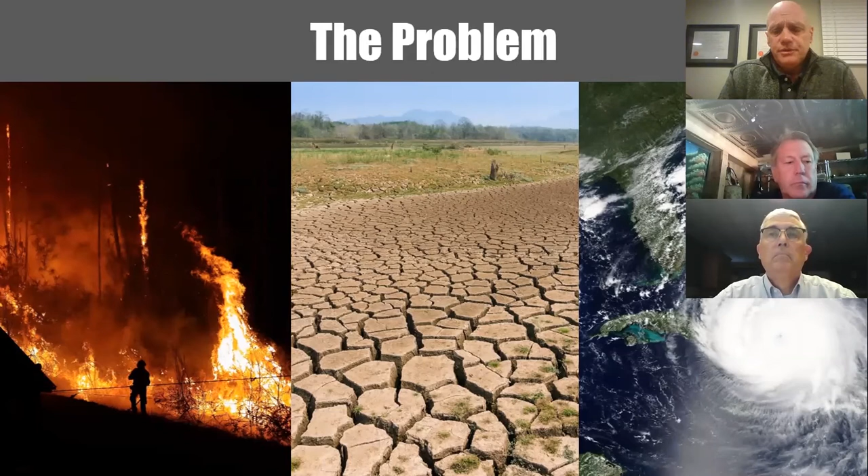Of course, the building industry is partly to blame for increasing climate change through CO2 emissions into the atmosphere.

We build a lot, and we're responsible as the design community for designing those buildings and hopefully reducing carbon footprint through two means: one, designing buildings that are low energy, that reduce carbon footprint during the use phase of building operations, which is pretty significant.

In fact, it's the most significant component of CO2 emissions. And then also, selecting and using materials in a way that reduces the embodied carbon emissions. That's the emissions from the manufacture and construction of buildings.

Every year, we build about over 6 billion square meters of buildings throughout the world. That's nearly 4,000 million metric tons of CO2 per year.

And by 2050, it's predicted by Architecture 2030 and other sources that the operational carbon emissions from buildings and embodied carbon emissions from buildings will be about equal, which means each of those needs to be addressed in a significant way.

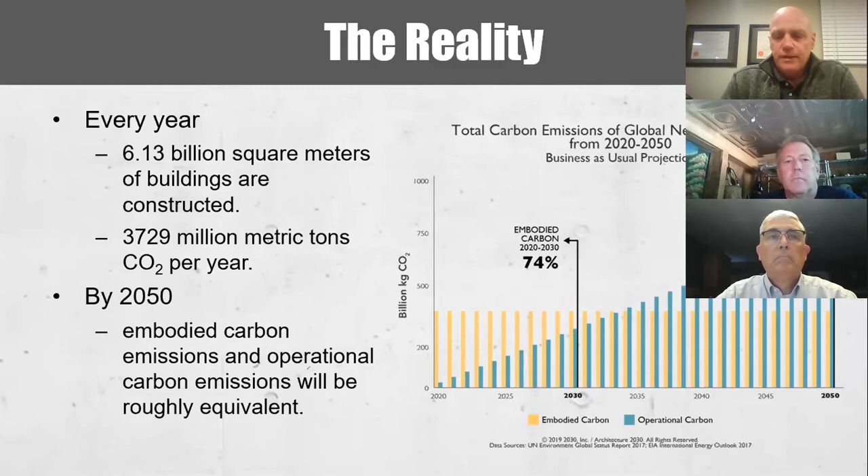The challenge is that building materials do emit significant carbon emissions. So embodied carbon from building materials produce about 11% of the annual global greenhouse gases. And concrete, iron, and steel produce about 9% of those annual emissions.

Now, likely the need for these robust materials will be in demand for the foreseeable future. And the trick here is to understand how we can minimize environmental impacts of these building materials. Specifically today, we're going to talk about concrete.

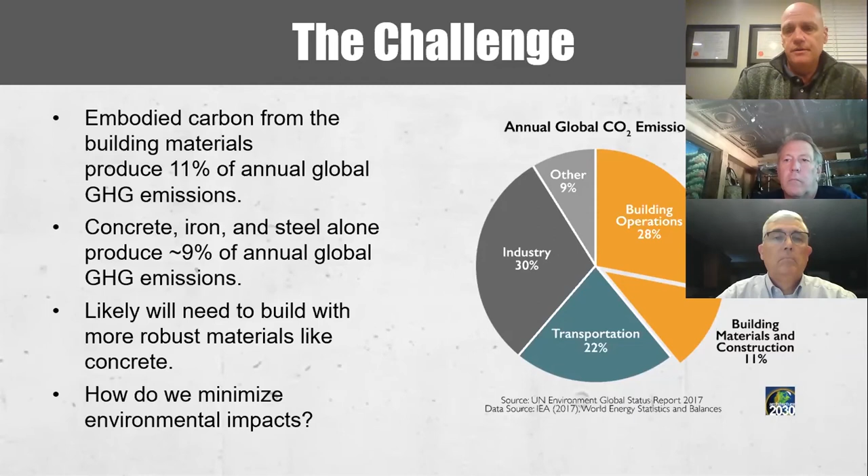What are the solutions? Well, it really is concrete innovations. Basically, we're talking about 6 basic steps: more efficient concrete mixtures, admixtures, blended cements, supplementary cementitious materials, carbon capture technologies, and high performance concretes.

So what do these two buildings have in common? Well, they're both places of worship. Both are built in Rome, Italy. But most importantly, both are built with concrete. And at the time, they were both innovative in the use of concrete.

The Pantheon, built in Rome in 27 BC, used Roman concrete, unique at the time, using volcanic ash and aggregate that was mainly recycled, some rock, but crushed tile and brick. The Pantheon is still standing today, 2,000 years later.

The Jubilee Church was built in Rome in 2003. And the innovation there is that they used photocatalytic concrete, which is self-cleaning. We'll get into more of that innovation later on in the presentation.

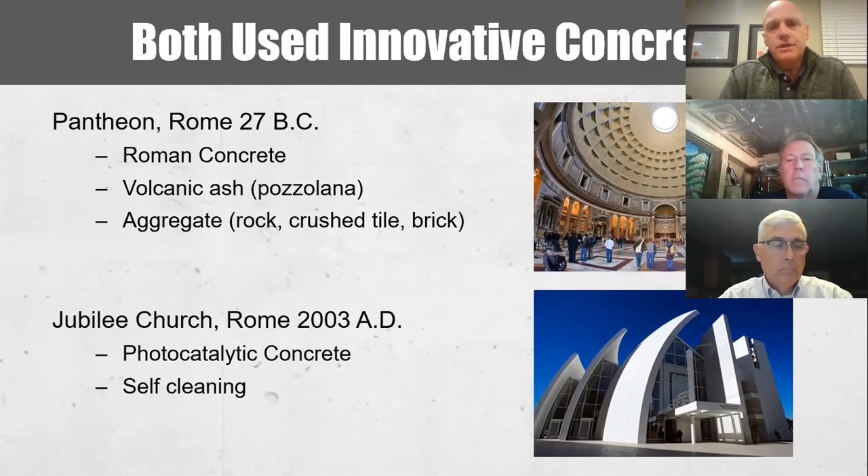Now, modern concrete is not that old. Really, ready-mix concrete is just over 100 years old. And delivering it in trucks is even less, started only about 80 years ago.

But Portland cement was invented in 1824, and it's combined with quarried aggregate and water really to make concrete. Those are the three main ingredients. Without that, you can't really make concrete.

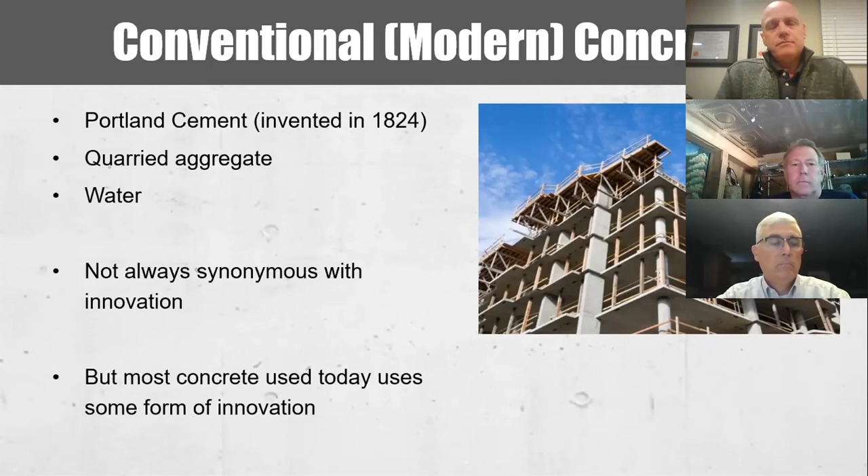And let's face it, concrete is not always synonymous with innovation. It's been around for a long time. But in fact, most concrete today uses some form of innovation, which we'll be talking about today.

The first innovation, and really the most important, is that we need to use the most efficient concrete mixtures. And Portland cement, which is the most important ingredient in concrete, is the glue that holds it together. It's one of the most valuable materials on the planet.

It's cost effective, it's available everywhere, it's durable, strong. Tallest buildings, largest buildings, longest runways, highways, everything is built with concrete. It's hard to imagine a building today that's not built with some component that is concrete.

And so that Portland cement needs to be thought of as this valuable material that can't be wasted. Even if you don't consider the environmental impacts associated with Portland cement, there are the economic impacts to consider. So both are important. If you can optimize the use of Portland cement, basically you're reducing the embodied impacts of concrete.

We really promote the idea of using performance-based specifications. There's not a lot of time to go through that today, what that really means, but basically it means no limitations on materials and quantities.

The standards today for concrete and the building codes really don't provide limits on the use of cement, admixtures, or supplementary cementing materials. They are really set by the performance criteria that you set as designers, whether it's strength, durability, stiffness, and so forth.

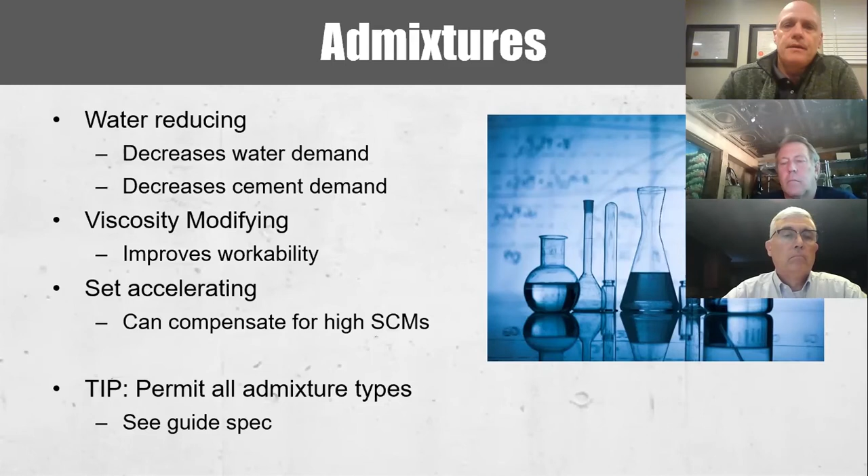Now this one is really important. Blended cements are a combination of Portland cement in addition to some other materials. The most common one is called Portland limestone cement, or type 1L, and it permits, in the standard ASTM C595, up to 15% interground limestone.

Interground limestone has nearly zero carbon footprint. It's usually a byproduct of the cement manufacturing process because there's a lot of powder generated when crushing limestone as the raw feed for making Portland cement. So if you can take some of that powder and intergrind it with clinker at the end of the processing of making Portland cement, you can lower the carbon footprint by as much as 10%.

Surprisingly, the performance of Portland limestone cement is almost identical to pure Portland cement. So it's really something that you need to specify and create demand for. It's still slow to catch on in this country, but to me it's a 10% reduction in carbon footprint just by using Portland limestone cement, with equal or better performance.

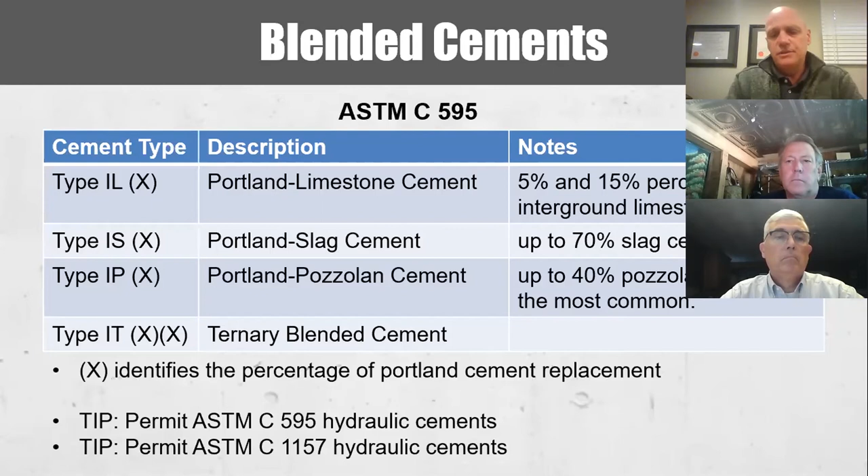What's great about it is that research shows you might be able to even use more fly ash and slag in combination with PLC to reduce carbon footprint even further. Now, there are other types of blended cements where you combine Portland cement and slag, or Portland cement and fly ash, and for the most part they work perfectly fine. But I would say they probably have even further barriers to acceptance, whereas Portland limestone cement really has no effect on performance and still provides that reduction in carbon footprint.

So let's talk about SCMs, or supplementary cementing materials. The two main ones that are used, and many of the projects you guys work on have concretes made with SCMs. Slag cement and pozzolans, like fly ash being the most common, are used in concrete all the time. And honestly, they provide the most reduction in carbon footprint.

I'll tell you why in a second. They're byproducts of other industries and therefore have very little footprint because they don't require a lot of processing. Slag requires a little more processing, mostly in grinding, but grinding doesn't take a lot of energy. And fly ash really is a byproduct of electric power generation. Yes, less of it is being made, but I'll tell you here in a second why there's still a great opportunity for fly ash in this country.

There's some other natural pozzolans even today, things like metakaolin or even volcanic ash that can be used. But in terms of the volumes required for concrete manufacturing, really fly ash and slag are the best options here.

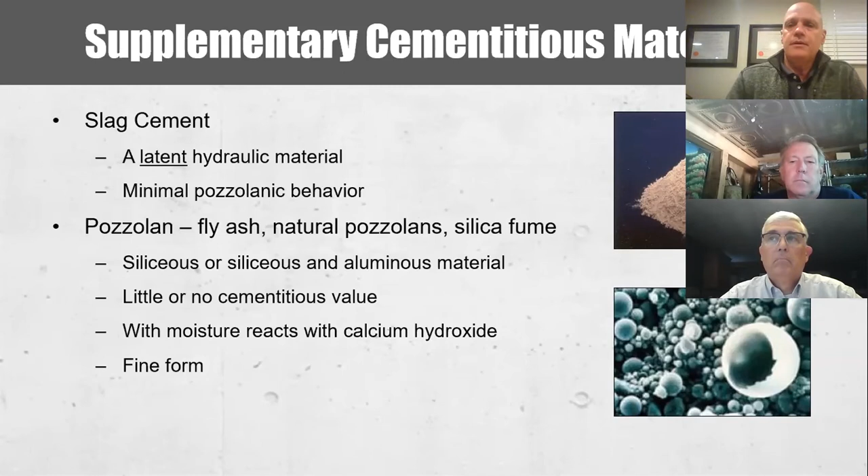Just a really quick chemistry lesson. You don't have to memorize this, but it demonstrates why these SCMs work so well. Cement reacts with water to form cementitious compounds. There are many compounds, but for the most part, the two main ones are CSH, calcium silicate hydrate, and calcium hydroxide. The CSH portion is the portion with crystals that really hold the entire matrix together.

Whereas the CH really is not very strong. It almost remains in a gel form. We don't see it that way, but it really is not that valuable. You'd rather not have that material.

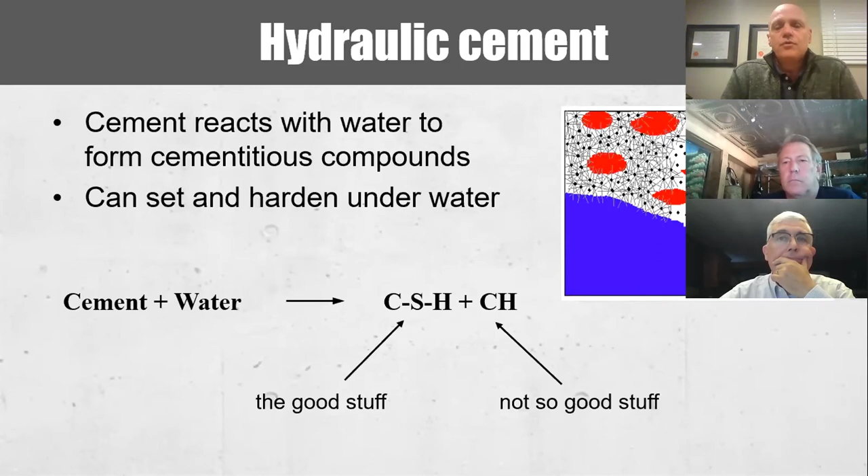And so if you look at the first line that represents just pure Portland cement with water, you get the CSH and the CH. But if you combine it with a pozzolan like fly ash, it reacts with the CH to form more CSH. That's why pozzolans like fly ash are so valuable. It eliminates the material you don't want in concrete and turns it into the material you do want.

Now, slag is a little different. It's not really a pozzolan, or has very little pozzolanic action. It is actually cementitious, but it needs this alkali lime activator, which is produced by the cement hydration process. So it does produce CSH, no CH - that's a good thing. And then there's a little bit of pozzolanic reaction that creates more CSH. That's why these materials work.

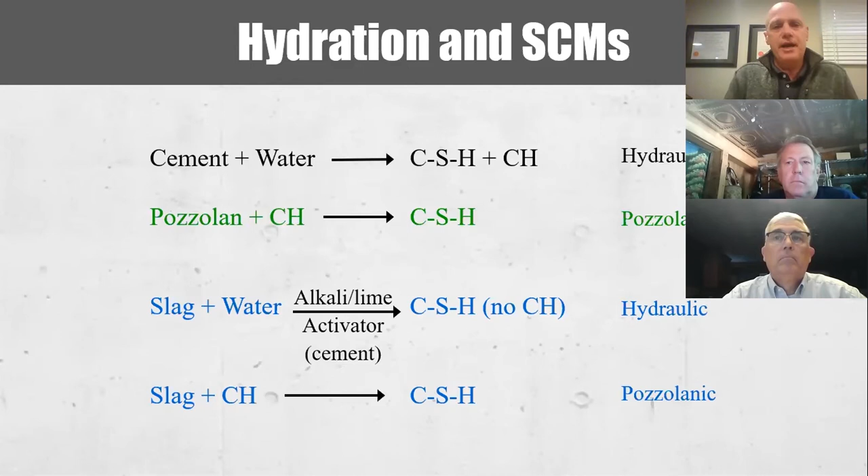It's not just that we're replacing cement. It's actually reacting with the byproducts of cement hydration that make them so valuable.

Just a case study - there are many, of course. Most high-rise buildings use high volumes of supplementary cementing materials. One of the biggest benefits of these materials is that they increase strength of concrete. And when you're building a high-rise building, using high volumes of SCMs is just a natural thing to do.

Trump Tower, 92 stories in Chicago, huge amounts of concrete - almost 200,000 cubic yards, which is massive. All the columns and walls required 12,000 PSI at 90 days. And remember that, because 90 days is important.

For elements of a building that don't require full strength at 28 days, requiring the strength at a later date permits higher use of supplementary cementing materials - again, a way to help reduce carbon footprint. The lateral resisting elements, the shear walls and so forth, went up to 16,000 PSI.

Now, self-consolidating concrete was specified for most of the project because of high reinforcement congestion, and then high volumes of SCMs were used to reduce heat of hydration. It basically used a lot of ternary blends and in some cases quaternary blends - in other words, Portland cement, slag cement, fly ash, and silica fume - to meet the requirements.

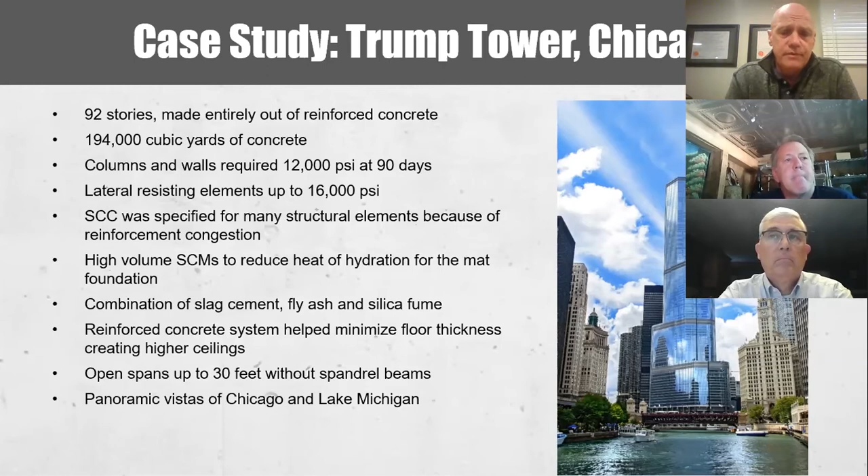And the whole idea here is, obviously a high-end residential building, 30-foot spans without spandrel beams. And if you've ever seen the location for Trump Tower in Chicago, beautiful vistas of the lake along the Chicago River.

Now, this is really, I think, the future of fly ash. Because of less reliance on electric power generation through burning coal, we're not going to have as much high-quality fly ash in the future. But we've been burning coal for a long time to make electricity, and most of that fly ash has been buried in landfills.

So there's a valuable material that some companies are now actually mining, beneficiating it in some way, which means it does need some processing, usually to dewater the ash. But also in some cases it may be out of spec to be used in concrete, so things like reducing the amount of unburned carbon, reducing ammonia, and adjusting particle size through different processes.

So I think this is a huge opportunity for our industry - 1.5 billion tons of coal ash in landfills or more that could be a source for literally decades.

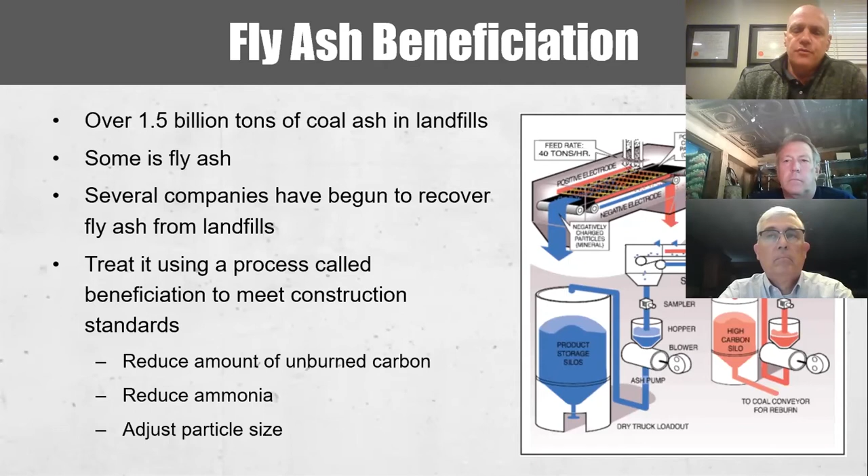And there are some companies already doing it. Another case study here: a project in South Africa, really designed with sustainability in mind. I'm sure many of you are designing projects with similar goals. In this case, the building came in at 50% more sustainable than the average office building. It reached the 4-star Green Star South Africa rating, used a lot of fly ash in the concrete, and reduced the overall concrete footprint by 30%.

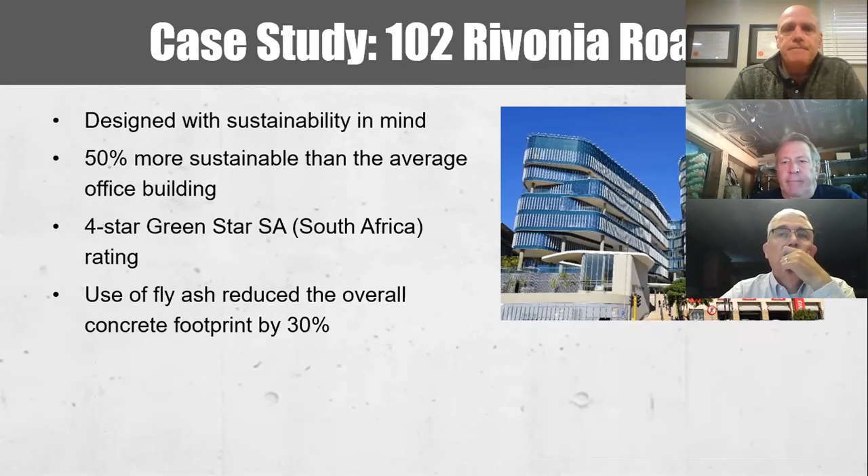The last item I'd like to talk about before handing it off to Dawn to finish the presentation is something that is probably not an opportunity today for most concrete, especially ready-mix concrete, called Geopolymer Concrete. But there's really a lot of promise with this concrete. It uses fly ash and/or slag and a chemical activator to form a hardened binder.

It's been done—there are companies that have actually created this concrete. It's obviously more expensive than conventional concrete, so it's usually used in very specialized applications, maybe high heat or high resistance to acids and so forth. But creating demand for it will result in more use and bring the cost down somewhat. The activators include sodium hydroxide or potassium hydroxide. They're highly alkaline, meaning they're caustic and hard to handle, expensive to make. That's what makes this concrete more expensive.

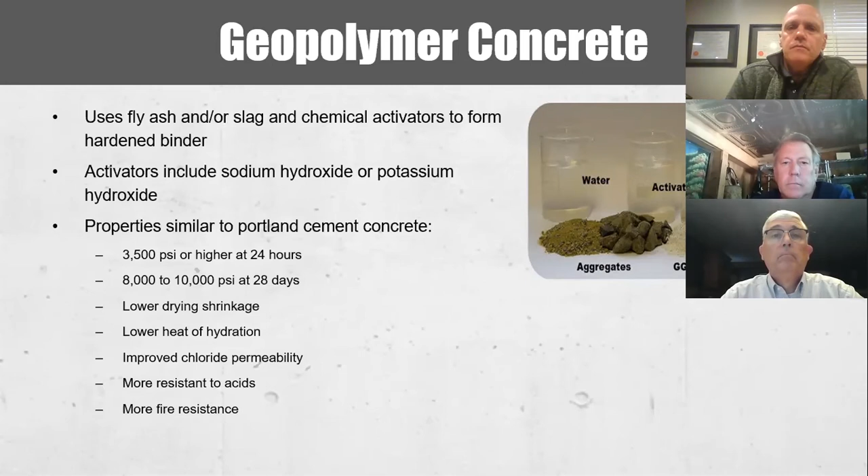But the properties are really favorable—similar strengths, a little bit higher generally than conventional concrete, but lower drying shrinkage, lower heat of hydration, and improved resistance to chemicals. Like I said, the drawback is the high cost to produce the chemical activator, and handling a high alkaline solution is just as difficult as handling a high acidic one. You oftentimes need temperature control during curing. So ideally, at least at first, there's an application for precast concrete.

What's really promising is the latest research out of Rice University. They studied all sorts of different fly ashes and slags to optimize the use of calcium-rich fly ash, nanosilica, and calcium oxides to use less than 5% of the traditional sodium-based activators. This means you can make concrete with a lot less activator, bringing the cost way down, plus making it easier to handle that caustic material, to a point where it may be commercially viable. So this is something to be looked at for the future.

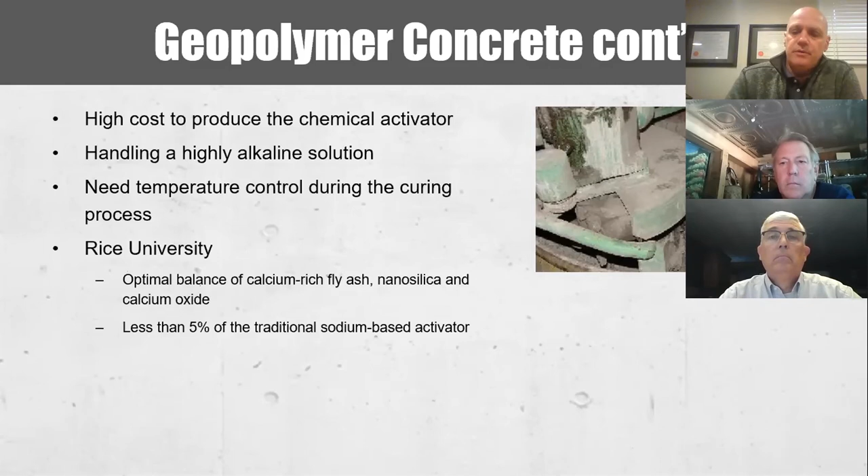It actually has been used—there's an example, and I'm sure there are more. The one we found was the Global Change Institute in Brisbane, Australia, Australia's first carbon neutral building and one of the first living building challenge projects. It's the first building to include structural geopolymer precast concrete, resulting in a significant reduction in the carbon footprint of the concrete for the building. So there's some promise with this material, but it's probably not something you can achieve today in the volumes you normally need on a building. Maybe something to think about for a case opportunity for a small project, or a portion of a project.

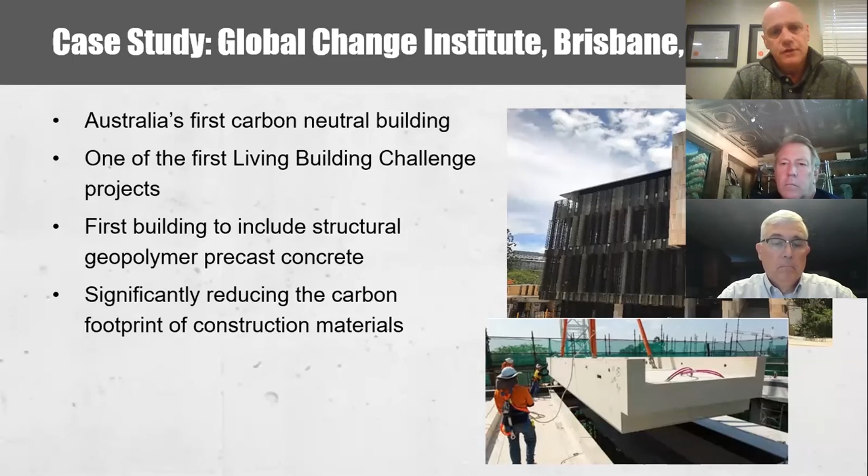With that, I'd like to transfer the presentation over to Don Thompson to complete the session today.

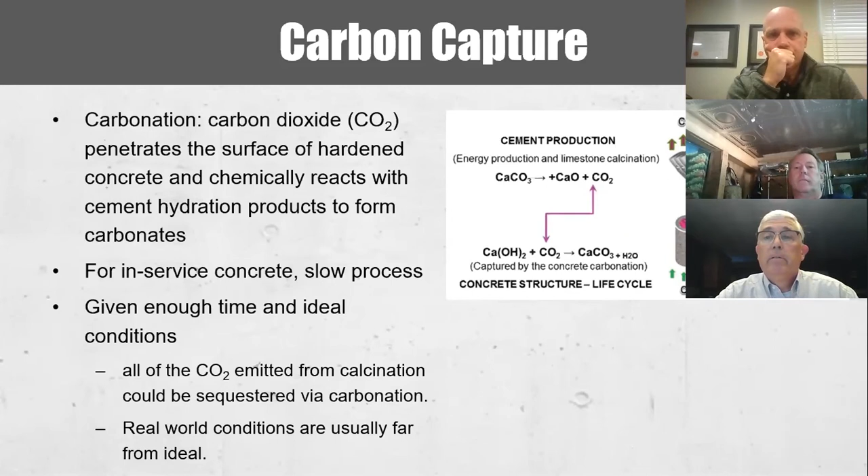The CO2 uptake is greatest when the surface to volume ratio is high. So when concrete has been crushed and exposed to air, that's a way to optimize this process.

Even with hardened concrete that's been in place, a study published in 2015 attempted to estimate how much CO2 was sequestered in concrete placed between 1930 and 2013. The study found that 4.5 gigatons of CO2 was permanently absorbed by hardened concrete throughout the world, representing 43% of the CO2 emissions from the production of cement.

So basically, we're looking at carbonation of cement products representing a substantial carbon sink and a game-changing development. Our industry continues to investigate ways to accurately quantify this process, which will impact the understanding of concrete's role in permanently helping to reduce greenhouse gas impacts.

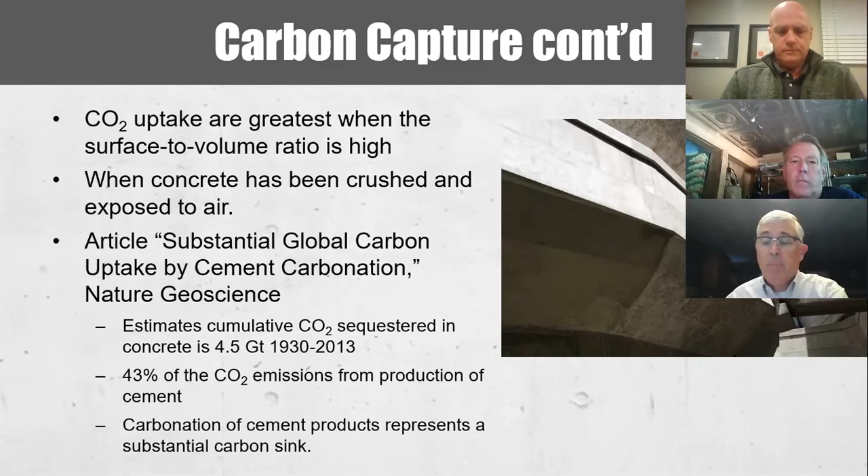As I mentioned, the best type of concrete for this natural carbonation process is crushed concrete, which can absorb more CO2 over a shorter period because you're maximizing the surface area of the material, so it can be more effective in that absorption.

Typically, concrete is not thrown away. Its weight and volume really move it more towards continual recycling. So you see it crushed and often used as roadbed or as backfill. It can even be used as aggregate for new concrete.

Ideally, studies have shown if you can leave the crushed concrete exposed to air for a period of 1 to 2 years before reuse, you're really enhancing and maximizing this process.

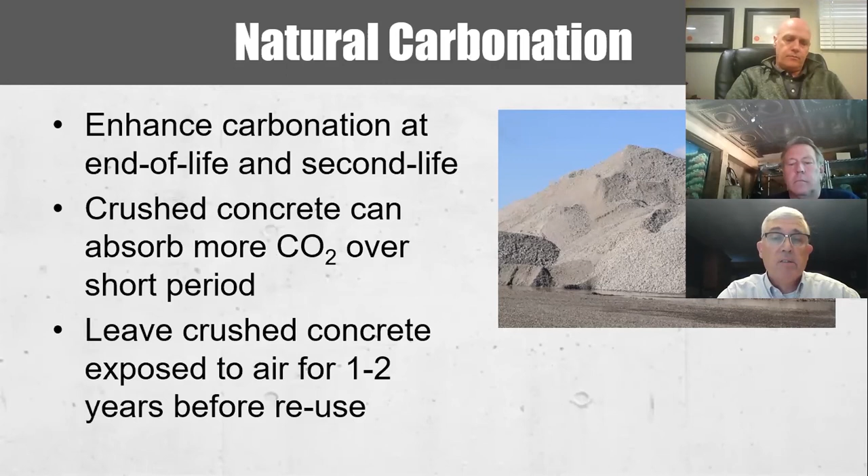So there are a number of entrepreneurs that have looked at this natural carbonation process and have been successful in developing ways of enhancing the production of concrete products by taking advantage of this ability of concrete to absorb CO2.

One such process, developed by a Canadian firm, takes purified and liquefied waste carbon dioxide captured from various industrial processes and injects this CO2 into the concrete during the mixing operation. This creates artificial limestone, or mineralization, within the ready mix.

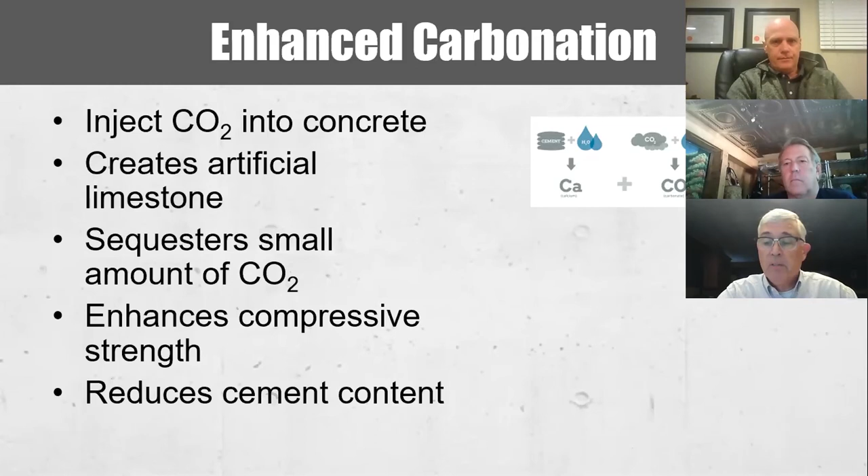The developers indicate there's a small amount of CO2 sequestered in this process, but probably more importantly, the compressive strength of the ready mix produced with this process is improved, which allows you to reduce the overall cement content in the mix. This is a viable process already in the marketplace, with over 100 ready mix plants nationwide taking advantage of it.

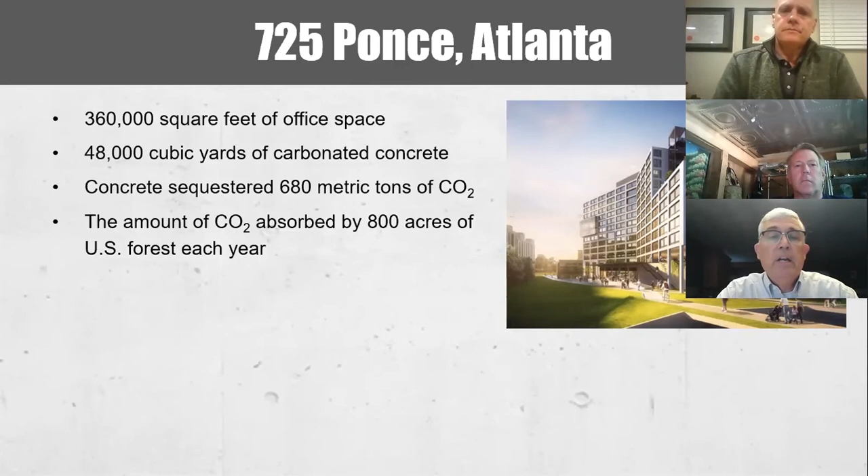Here's an example of a project done using this injection process: a 360,000 square foot office building that used 48,000 cubic yards of carbonated concrete, which sequestered 680 metric tons of CO2 — equivalent to the amount of CO2 that would be absorbed by 800 acres of US forestry in one year.

Another example of enhanced carbonation is the use of specially formulated cement. This cement is manufactured using less limestone, and in the calcining process, the kilns are fired at lower temperatures. The developers indicate this results in 30% less greenhouse gas emitted during manufacturing of this specially formulated cement.

That cement is then used to manufacture concrete products, primarily right now in the precast industry. You manufacture your precast components and then move them into curing chambers that have a CO2-rich environment, and with this specially formulated cement, the concrete is able to absorb CO2.

Based on the developers' indications, the concrete absorbs CO2 equal to about 5% of its weight, and overall they claim the carbon footprint of concrete produced with this process is reduced by 70%. This has seen some application in the precast industry, and the developers are looking for ways to introduce it into ready-mix production as well.

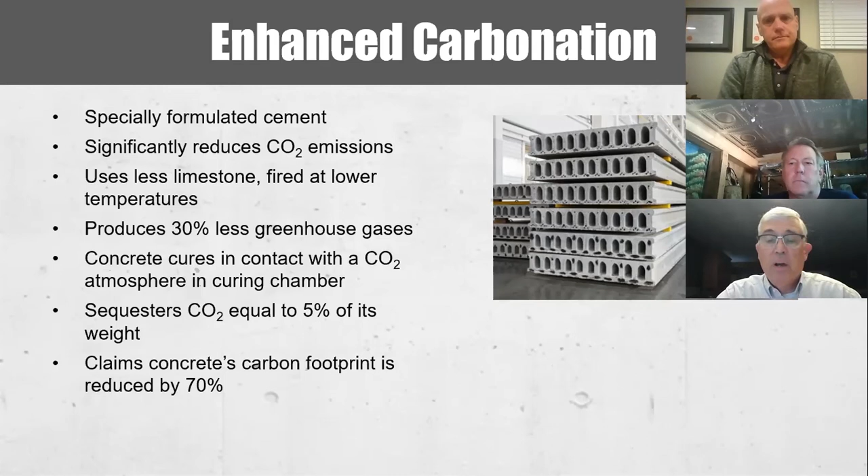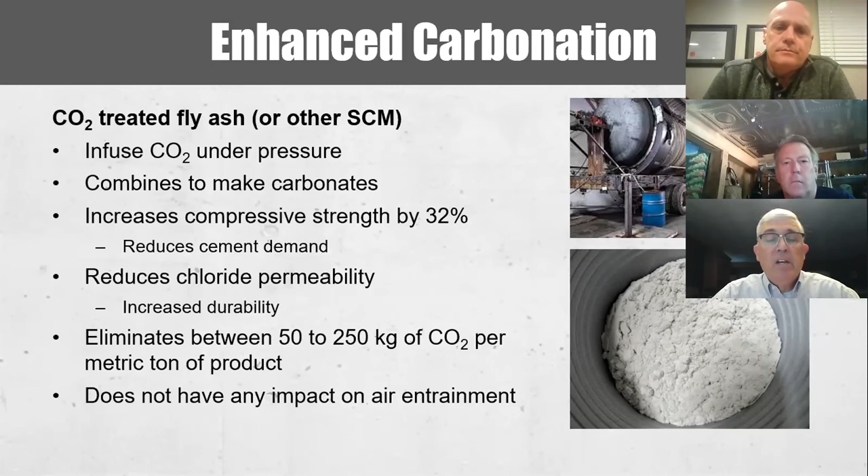Compressive strength improves by 32%, which contributes to reducing overall cement demand, reducing your carbon footprint. It also increases durability and improves chloride permeability of the concrete created. The developers estimate it eliminates between 50 to 250 kilograms of CO2 per metric ton of product produced, and does not have any detrimental impact on air entrainment of the concrete created.

And then finally, a fourth process uses unpurified industrial CO2 emissions from various industrial processes combined with metal oxides, which is then injected into a proprietary process where you have small rock particles or recycled concrete particles that then absorb this CO2 and become coated with artificial limestone.

The developers of this process claim that 44% of this artificial limestone by mass is permanently eliminated or mineralized CO2 material, and they claim that carbon negative concrete is achievable. For example, if you had 1 yard of concrete that contained 3,000 pounds of aggregate, 44% of that by mass would amount to about 1,300 pounds of mineralized, permanently absorbed CO2 material, which then offsets the roughly 600 pounds of CO2 generated during production of the cement used in that same yard of concrete. So by a factor of 2, you're absorbing far more CO2 than was released during the manufacturing process for the cement in that concrete.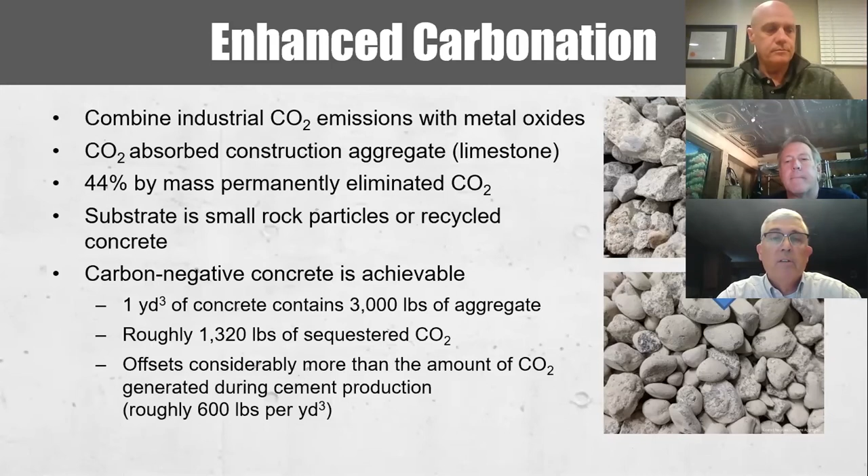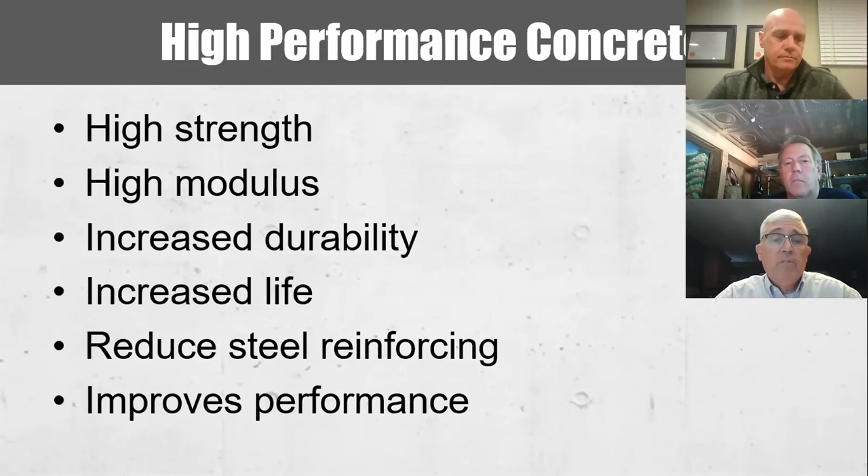So now let's talk about high performance or other examples of high performance concrete. We'll talk about the high strengths, greater flexibility and tensile strength and durability, increased life, the ability to reduce traditional steel reinforcement, and to improve overall performance.

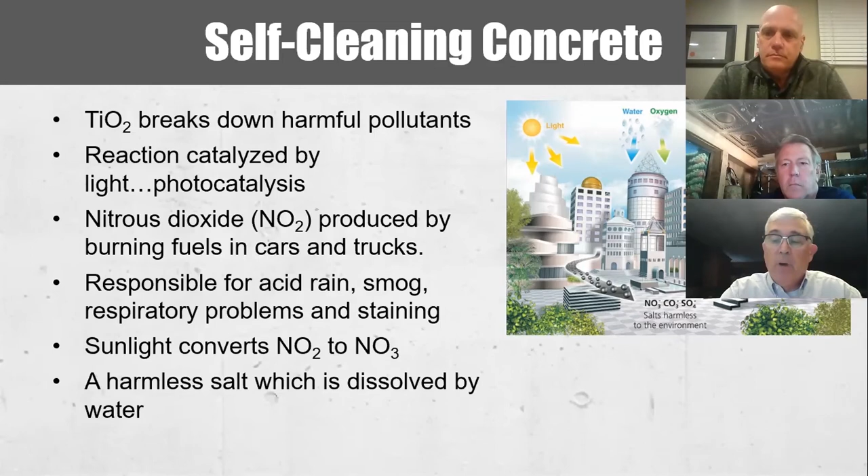When that nitrous dioxide comes in contact with titanium dioxide concrete, the sunlight will convert it into harmless nitrate salts, which can then be washed away by rainwater. That's exactly the process used by Richard Meier, the architect on the Jubilee Church, to maintain the pristine, pure appearance of this design.

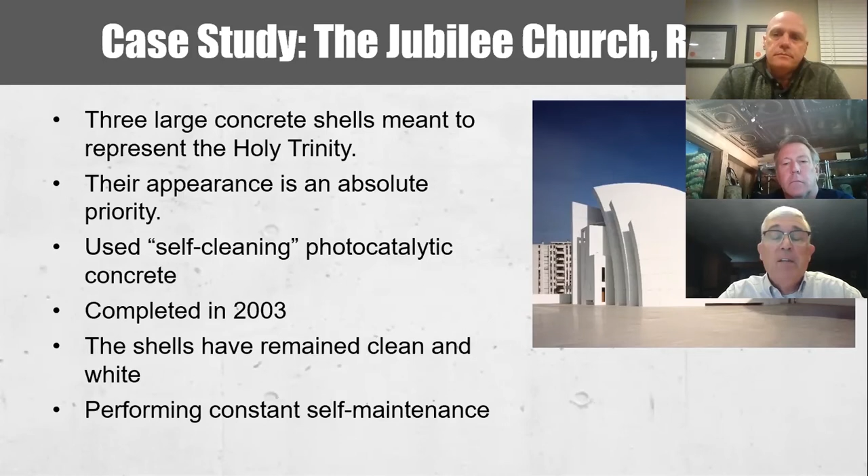These three large concrete shells that you see in the photo were designed to represent the Holy Trinity, so their pure, pristine appearance is an absolute aesthetic priority. With the self-cleaning photocatalytic concrete, this project, built in 2003, is still looking as clean and as white as it did when it was first opened, because of this continual self-maintenance process.

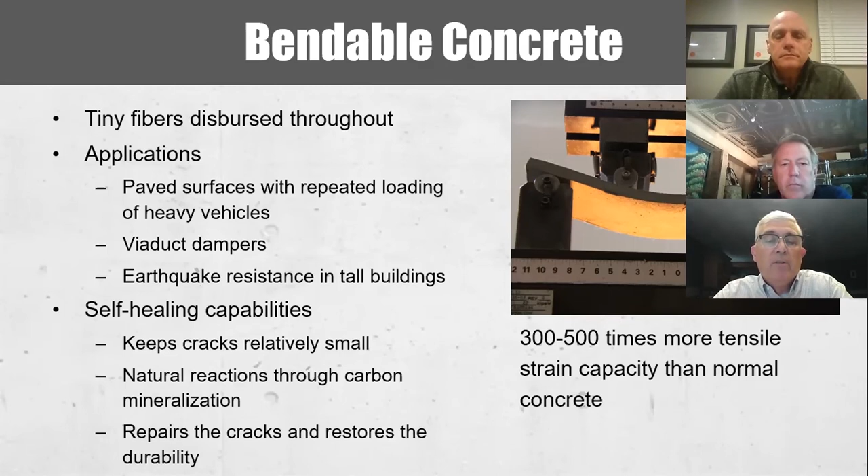Paved surfaces, for example, see a lot of heavy vehicle traffic. For viaduct dampers that are getting concentrated and repetitive loading, as well as for components for earthquake or seismic foundations in tall buildings. It also has self-healing capabilities: the fibers help keep surface cracks relatively small, and there's a natural reaction with moisture that causes latent concrete or cement products to allow for further mineralization, which serves to repair those cracks and restore the durability of the surface.

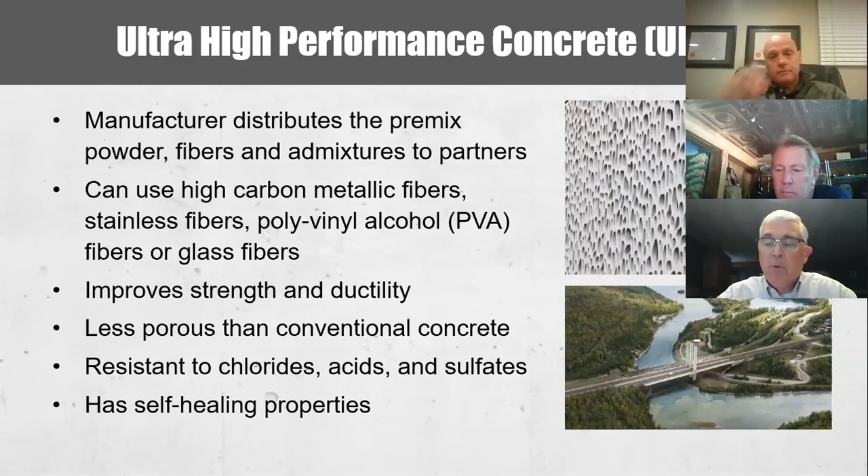A similar example is ultra high performance concrete, UHPC. In this case, a manufacturer distributes a premix of powder, fibers, and admixtures, which can be used to create much stronger and flexible concrete. The fibers can be carbon metallic, stainless, polyvinyl alcohol, or glass fibers, resulting in a less porous concrete versus conventional concretes, more resistant to chlorides, acids, and sulfates, and imparting a similar self-healing property to what we discussed with bendable concrete.

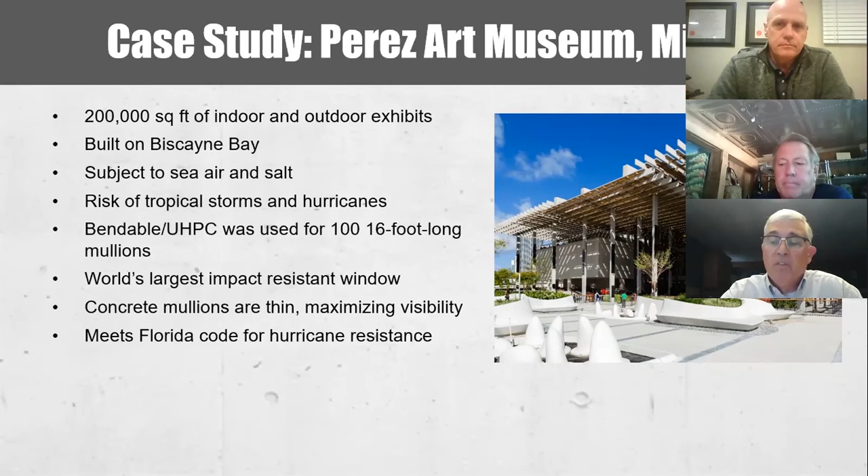And then you have conventional fiber reinforced concrete. This is material that's been around for a long time. The fibers aren't as sophisticated as what we just talked about with bendable concrete or UHPC, but still you can incorporate them, and many ready mix producers can supply fibers.

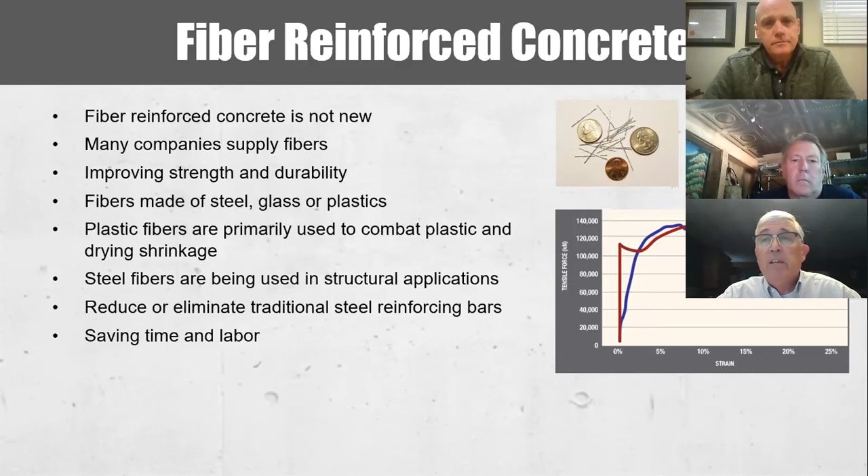They can be steel, glass, or plastic, combined with the ready mix to improve strength and durability. Plastic fibers are primarily used to combat plastic and drying shrinkage cracking. Steel fibers can be used in structural applications to effectively reduce or eliminate traditional steel reinforcing bars.

Which in turn helps save time and labor on job sites. Here's a case study where helical steel fibers were used to reduce the amount of traditional horizontal steel in this project.

That holds those face shells the required distance apart to create a cavity for ready mix concrete and reinforcement. And then those web ties, as they're called, also extend almost all the way out to the face of the forming to create flat surfaces that run continually vertically, forming furring strips or providing attachment points at regularly spaced intervals, so you can attach your interior and exterior finishes directly to the formwork.

So unlike conventional formwork, where the reinforcement and concrete are poured and then you strip the formwork away, in this case you're leaving the formwork in place to take advantage of the insulation in the formwork itself, as well as the ability to attach finishes directly to the formwork and reduce steps in construction.

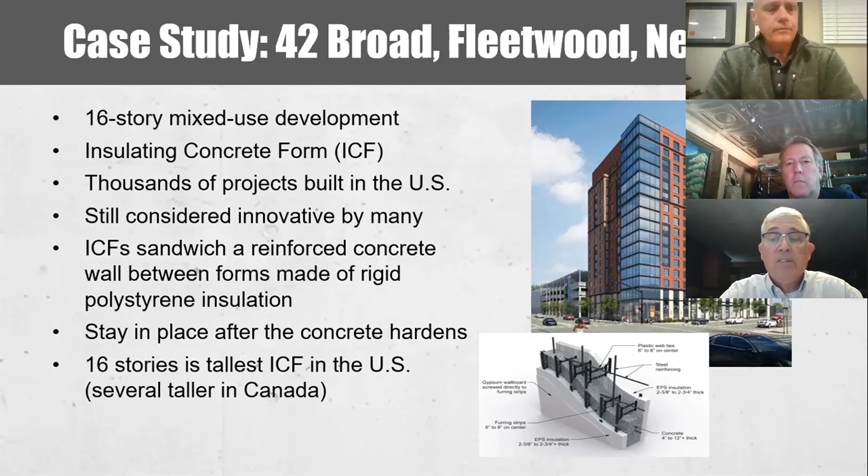With the lightweight formwork, these are very lightweight panels, easy to work with. The openings were cut out when these panelized assemblies were created off-site, then brought to the site and craned into place. With the use of the helical steel fibers, you eliminate all the horizontal reinforcement, so now it's very easy to butt the panels together, which really speeds up construction.

Once the panels are in place, vertical rebar is inserted where it needs to be, and then the fiber reinforced concrete is placed to complete the installation.

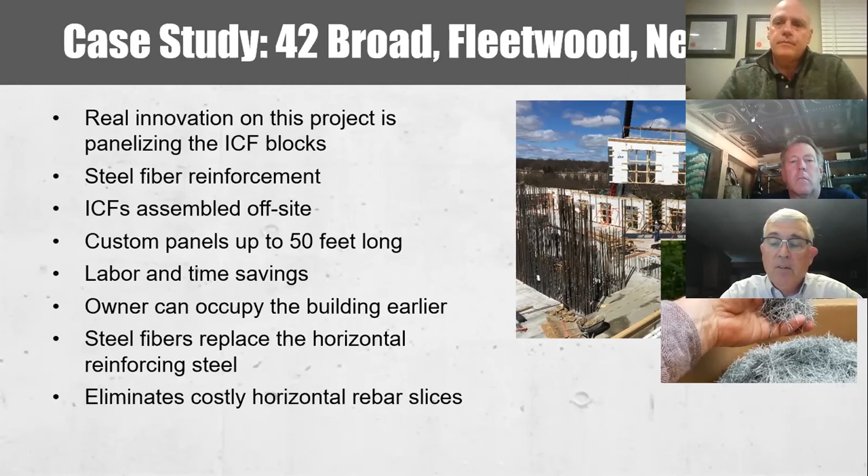Then we have graphene concrete. Graphene is single layers of carbon atoms made from graphite. Graphite is very inexpensive, and this process is capable of large-scale manufacturing. It's not yet commercially viable, but it's being looked at very carefully.

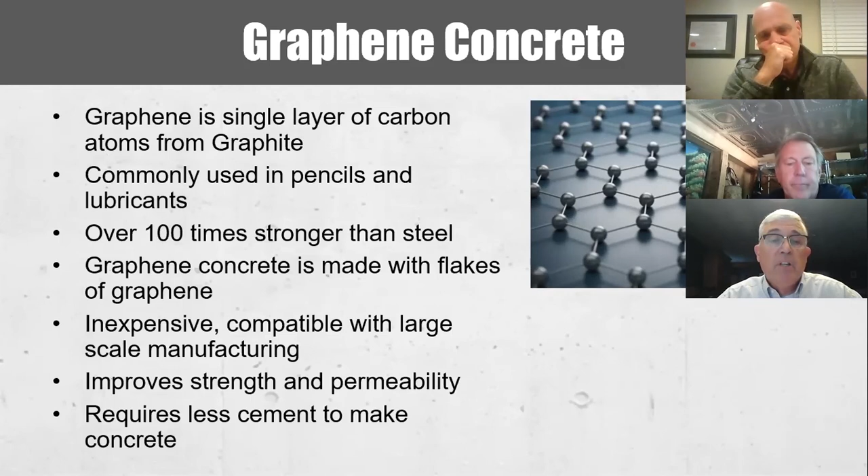You take these graphene layers, and flakes of it are combined with mixing water to create the concrete you're going to be using. It creates very strong and very permeable concrete, reducing the cement component in the concrete very well, suitable for large-scale production applications. So we're watching this very carefully as well.

And then we have self-consolidating concrete, which is a highly flowable concrete. With the admixtures that are typically used, it stays non-segregating, so you're not seeing a separation of the constituent ingredients, which would reduce the strength dramatically. It can be placed faster than regular concrete with less finishing, no mechanical vibration, and it improves the uniformity and provides much smoother finished surfaces.

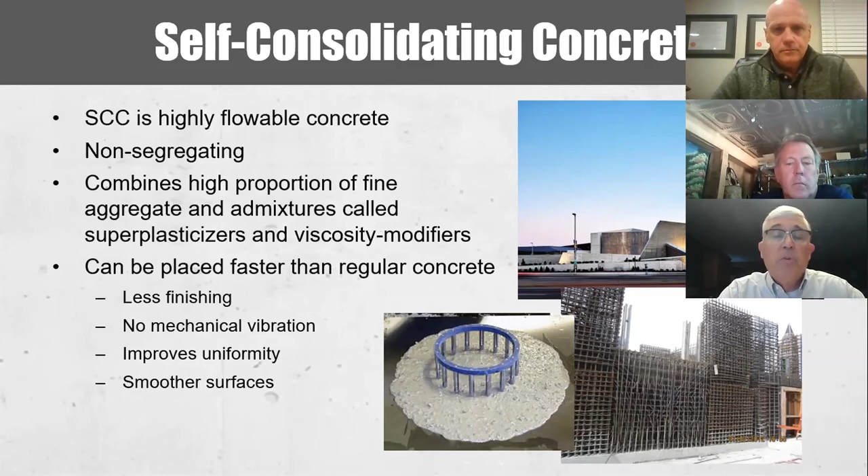So here you have 432 Park Avenue, New York. At the time of its construction, it was the tallest residential tower in the United States. It had an exposed exterior grid of this self-consolidating concrete with a very smooth finish. The aesthetic required not just the exterior to have a high quality look, but that aesthetic was allowed to be exposed on the interior as well.

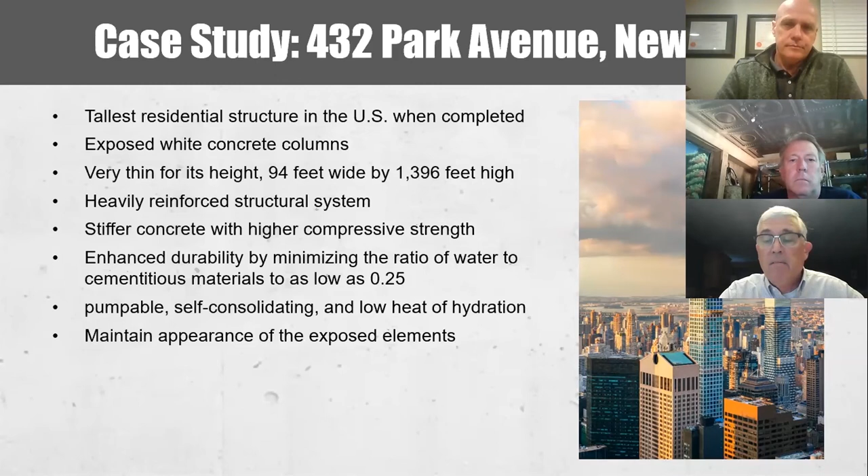The project was very thin for its height, so it was heavily reinforced, and the flowability of the mix was important for the high amounts of congested reinforcement on this project, as well as enabling the material to be pumped to the tall heights of this building while maintaining the nice aesthetic desired for the project.

So that covers all of the innovations we wanted to share. There's really no one single solution that we see.

We see the future being one where many of these different innovations will be used in combinations, whether it's blended cements, supplemental cementitious materials, innovative use of fibers, geopolymers that Lionel mentioned, as well as exciting developments with carbon capture, which can enable concrete to sequester and permanently remove from the environment more CO2 than is emitted during manufacturing. So with that, I think we'll move on to questions.